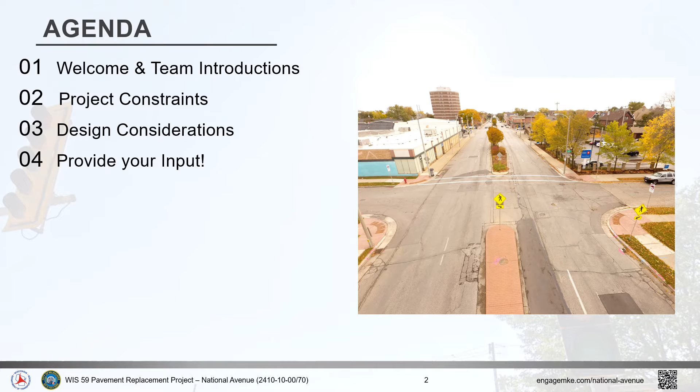Design team members are as follows: myself, Christine Hanna, Project Manager with Wisconsin Department of Transportation; David Tapia, Project Manager with City of Milwaukee; Megan O'Connor, Support for Business Liaison with City of Milwaukee; Cassie Goodwin, Outreach Support with Smith Group; and Margaret Welsh, Outreach Support with Smith Group.

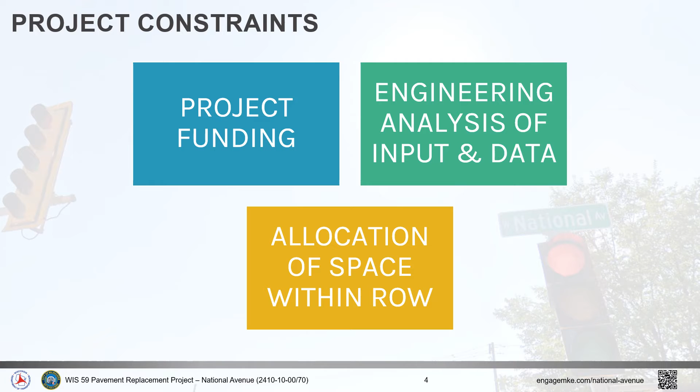During the design investigating process, we have identified several elements that may impact the project schedule, funding, engineering analysis and input data, and finally impacts on the right-of-way.

Below are several considerations impacting design, not necessarily in order: historic properties, oversized and overweight routes, design vehicles, right-of-way, parking flex spaces, sidewalk, and transit needs.

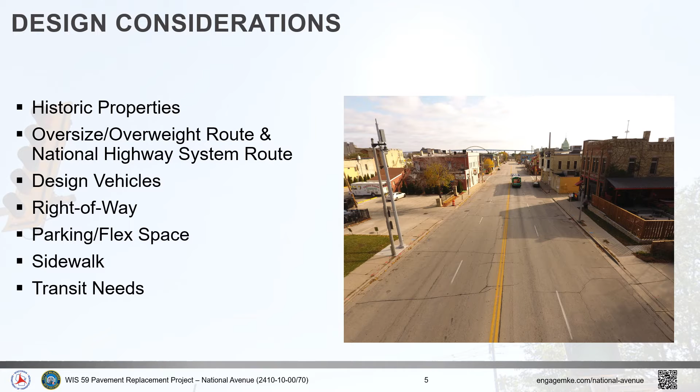Please allow me to share some of these considerations in detail. For historic properties, the design team identified different types using color coding: orange reflects listed historic properties, blue shows potentially eligible historic properties, and yellow identifies eligible historic properties.

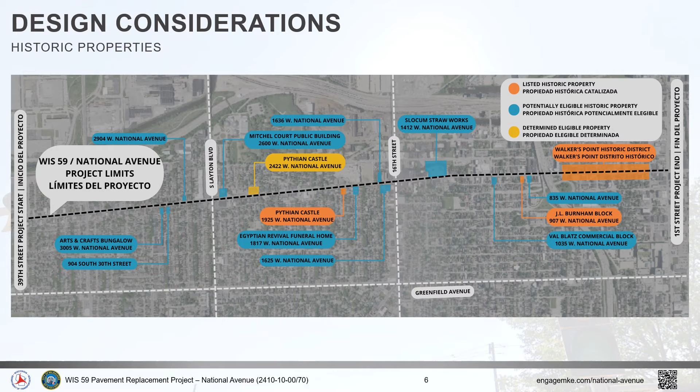Another design consideration is truck size and route on National Avenue, which is located on the National Highway System. National Avenue is designated an oversized, overweight route, which only permits certain dimensions and weight for trucks. The highway must be able to accommodate these loads to maintain performance and manage maintenance cost.

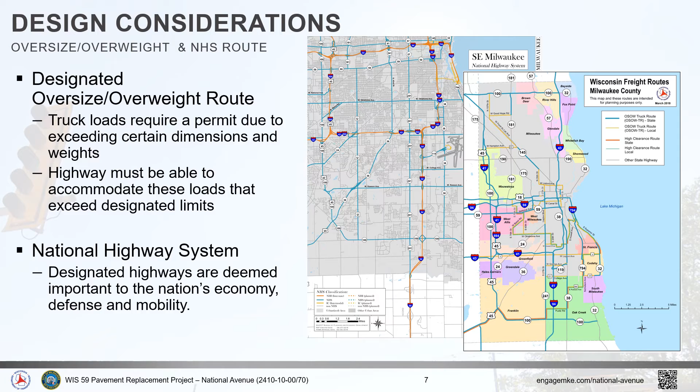Another design consideration is for the trucks allowed on the oversized overweight route — turning movements, allowing them to make these turns safely without impacting other roadway features.

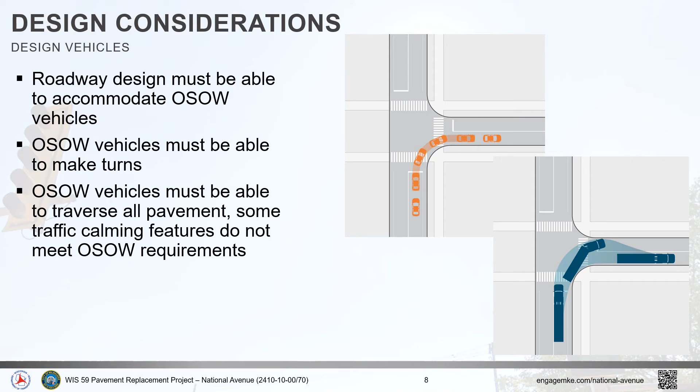Design consideration for right-of-way usage: we have two segments on this project. From 39th to 13th Street, the right-of-way width is 90 feet. From 13th to 1st Street, the right-of-way width is 75 feet. These right-of-way widths have to be planned for, as we are not planning any real estate acquisition, just temporary limited easement when replacing curb ramps and driveway approaches.

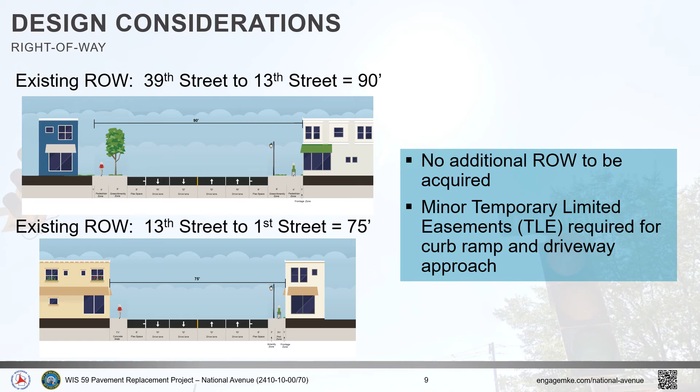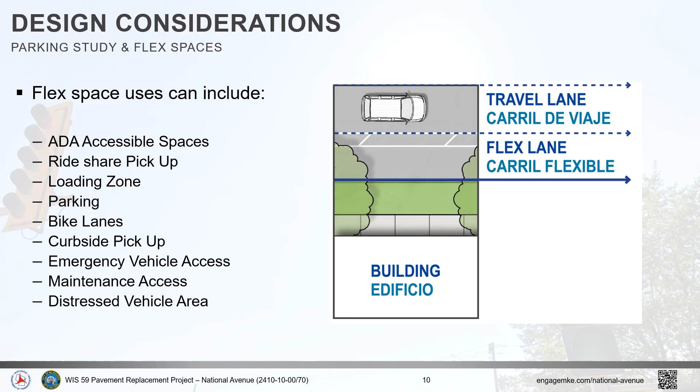During several design phases, the team looked at the need for parking needs and flex spaces that can be used for loading zones, emergency vehicle access, and other needs.

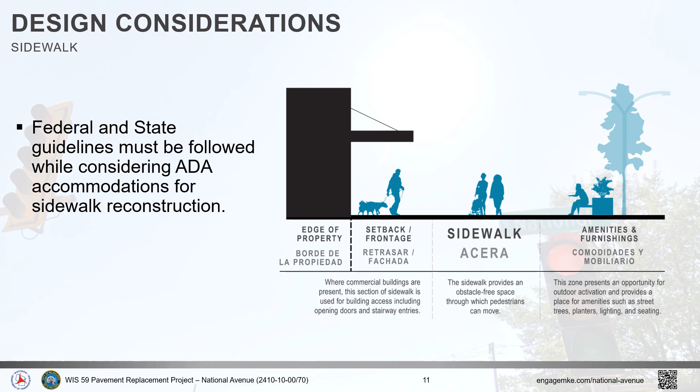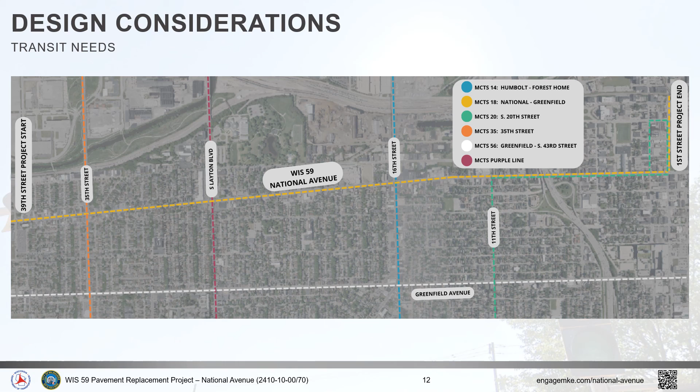We need your feedback and help to continue the project development and reach successful project implementation. Here is how: sign up for project updates, participate in surveys, add your input through the mapping project, and participate in future public involvement meetings.